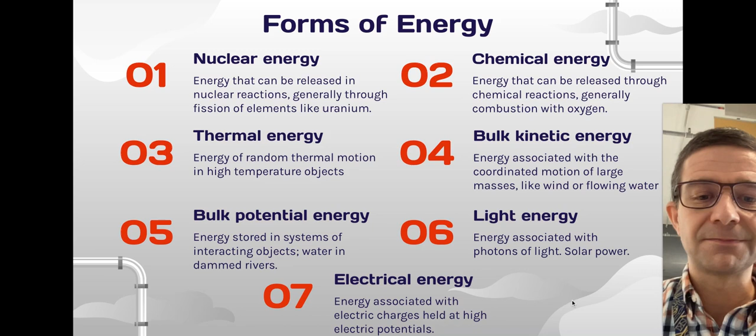When we think about energy in terms of power sources, we can split them into a couple of different groups. Primary versus secondary energy. We're talking about, is this a form of energy that can be harvested and is not processed or ready to be used? This would include fossil fuels. Oil is a big store of energy, but it's not directly usable for its energy benefit.

Same thing with nuclear matter, or even wind and solar, unless you're going to go and stand out in the wind to cool down or stand in the sun to warm yourself up. These are not directly usable for civilization for the purpose that we need energy.

Secondary energy, on the other hand, are the intentionally processed forms of energy, electricity being the primary one that we'll think about. But thermal energy is used in engines like combustion engines to produce motion. So this means that energy has been processed and is intentionally getting ready for use.

Renewable energy and non-renewable energy is a classification of energy having to do with whether the resource, particularly the primary energy source, is a finite resource or something that can be replenished constantly.

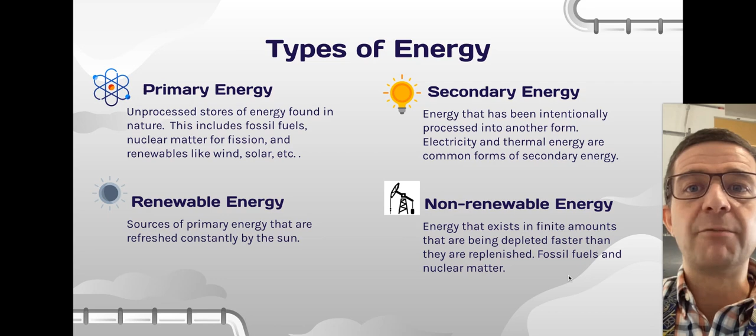Fossil fuels do replenish as biomass decays under heat and pressure to form coal and oil, but very, very slowly compared to the rate that we consume it. So those are just some definitions here.

In terms of the calculations or the problem solving that's done in this unit, two terms, specific energy and energy density, are important to learn and understand the distinction between them. These are used to quantify the amount of energy that's stored in non-renewable fuel sources. So how much chemical energy do you have in a kilogram of coal? That would be the specific energy associated with coal. And we see that that's 3.2 × 10^7 joules per kilogram.

So you can do problems where you figure out what mass of coal can be carried on a train to a power plant, and that can help you understand how much energy can be harvested from that mass of coal. On the other hand, energy density is looking at the energy per unit volume that can be produced by something. So we're usually talking about a meter cubed for the SI unit. For many of these, those numbers are just a ratio apart, the ratio being the density of that material.

But in this table here, you'll be able to see some patterns in energy density and specific energy. So pause and take a moment to look in the specific energy for patterns or differences, take a look in the energy density for patterns or discrepancies, and then I'll mention a few of them. You can pause now and look.

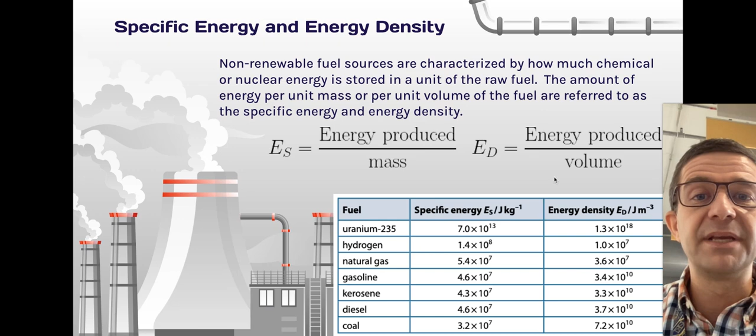I encourage you to follow this link to get to the interactive version of this data that looks at how global energy consumption has changed over time. The page that's there goes into a lot of detail about how these changes are measured and how things have been changing, particularly in the last 50 years or so. The data is a little old now.

Some of the things that you may notice here are, of course, that over the last 200 years, energy consumption globally has increased more than tenfold, starting particularly at the Industrial Revolution, and then with the advent of widely available electricity. So the demand for energy has grown and grown. And this curve also is driven by the relative affluence of human civilization as more and more people move to cities where there is access to all of these things that happened in the 50s to the 90s and early 2000s.

The other thing we notice is the recognition that oil and coal are limited and finite started to lead the drive to renewable or alternative energy sources. But even though a lot of technological advances have been made in these areas, they still account for a very, very small fraction of our energy portfolio. So taking a look through there and learning a little bit about the stories of energy and how energy consumption has changed would be a really good thing to do.

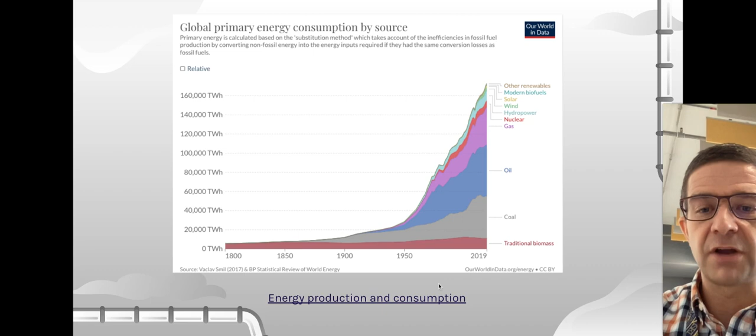Power production involves the conversion of energy from one form to another. And as we've learned with, say, a skater going up and down a ramp, that energy conversion from potential energy to kinetic energy is never 100% efficient. We think about friction as converting some of the kinetic energy into thermal energy that is dissipated or wasted. And the same thing is true inside of power plants. And following that energy to see where those inefficiencies are, to see where the energy is lost, because of course it's never truly lost, it's just converted into a form that we can't use.

Engineers use what are known as Sankey diagrams. A Sankey diagram is usually read from left to right, where energy or whatever quantity is being studied starts off in one form and then is generally converted along with some losses. This diagram is showing those losses all in red for a coal-fired power plant, leading to the energy that is necessary to, say, illuminate the page in a book. So here we have 100% of the energy, or 100 units of coal, inside of the power plant. 35 units are converted into electricity, and 65 units are lost during power generation to thermal energy. This is typical for a coal-fired power plant.

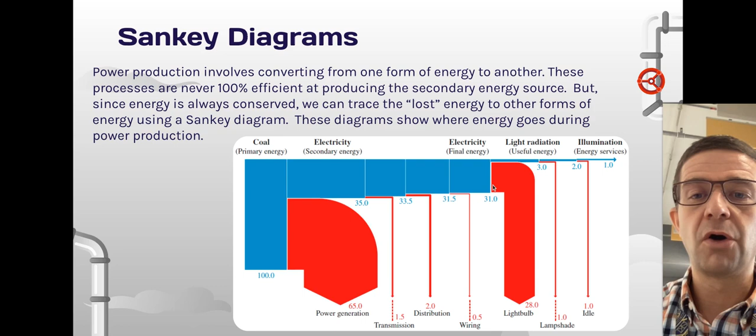As you go along, of course, you can always calculate percentages here to figure out how efficient something is. And these efficiency calculations are the second type of calculation that are often done in topic 8.1. Efficiency, either with power or with energy, is done as the ratio of, say, secondary energy to the primary energy. How much electricity do you get for how much coal? It can also be done in terms of power, the power out, or the useful power over the power in.

So here we have maybe a little more detail into a fossil fuel powered turbine. So we have the fuel oil here with 274 megawatts of fuel oil. MWe is a megawatt electrical, converting everything to electricity units. The boiler burns the oil, converting it to steam rather efficiently here with very few losses. You can heat up water. The turbine, on the other hand, is only about 60.

Is only about 30% efficient. So you have 172 units of energy that are lost to the condenser for every 72 units of electrical power produced.

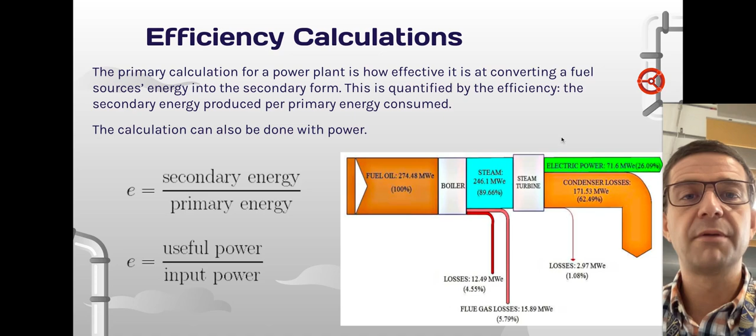The remainder of this topic, the sort of second half, looks at the specific types of power plants and their relative advantages and disadvantages. We're going to start off with two non-renewable power plant sources. These are the ones that are the most common. So we're looking at coal-fired power plants or oil or natural gas. And then we'll talk about the modifications that are necessary for the use of nuclear fuel.

This diagram here is representative of what you would generally look at. Inputs to the system are obviously the fuel source, and this could be coal or oil or natural gas. All would be approximately the same. And you need some source of cooling. Usually a river is used because it provides a constant source of cool water.

Burning the coal is pretty obvious. It produces carbon dioxide and water, as all combustion does. And that's used to boil water. Usually that water is in a closed loop and it's not directly sent out to the river, raised to very, very high temperatures, where it is fed into a steam turbine. As the steam pushes on the turbine, it cools, but needs to be condensed by being exposed to cooler temperatures.

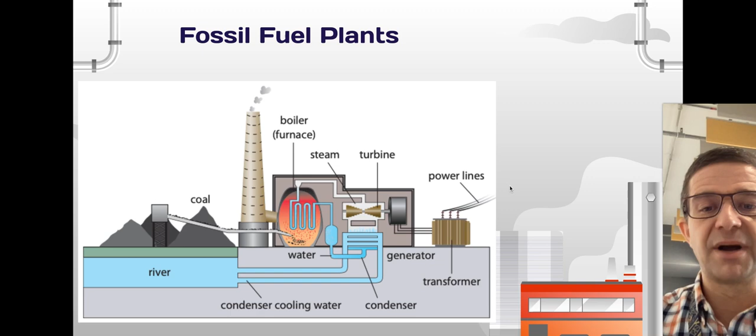The turbine, as it spins, turns a generator, and the moving magnets inside of a generator produce electricity, as we'll learn about in topic 11, and that's sent to a transformer and ultimately to power lines. So in terms of your Sankey diagram, we can compare what we see here to what we saw on the previous slide, where you have fuel coming in, the boiler producing steam, and the turbine producing electrical power. So we have the coal coming in, the boiler producing steam, the steam driving a turbine to produce electrical power.

When you work with nuclear fuel, combustion isn't the way that steam is being generated, but you are still working with all of the main parts of a steam-based power plant. It's just that the thermal energy is coming from nuclear fission. So in nuclear fission, you have fuel rods. Fuel rods would be those that contain the fissionable material, although usually it doesn't undergo spontaneous fission. It usually undergoes fission when it's exposed to or bombarded with

relatively low energy neutrons. The fission of the nuclei releases additional neutrons, and those neutrons go on to hit nuclei inside of the other fuel rods, creating what's known as a chain reaction. So one neutron, for example, might cause a nucleus inside of this second fuel rod to undergo fission, releasing 2 or 3 additional neutrons, which may bump into these other fuel rods, ultimately releasing more and more neutrons, which can be a runaway problem.

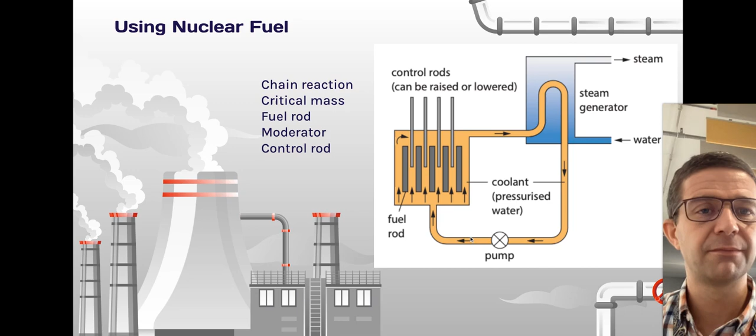So the moderator is important to slow down the neutrons to allow fission to take place. And in the process of slowing down those neutrons, it absorbs the energy that goes into the steam generator as well. I think that covers the basics of a nuclear power plant. Your textbook has some more details, be worth taking a look at.

When we talk about the risks and rewards of fossil fuels and nuclear fuels, they'll sound similar and different. The advantages of fossil fuel plants are that we have an extensive network of power plants in place in most countries that allow for fossil fuels to be used pretty much where they are needed to produce electricity for communities. It's a relatively well-developed technology with a variety of different power plant styles to use a variety of fossil fuels. Relatively cheap and high power output because of the high energy density of fossil fuels.

Disadvantages: they are non-renewable, so they will eventually run out. We also recognize that they produce a good deal of pollution, specifically carbon dioxide. But previously, they've also caused problems with acid rain and other byproducts. And the carbon dioxide in particular contributes to the greenhouse effect.

In terms of nuclear power, again, the high power output is probably the biggest advantage. And we also have relatively large reserves of nuclear fuels because we really haven't been using them as a civilization for particularly long. Nuclear power plants have the additional benefit of not producing greenhouse gases. However, they do pollute. The waste products can be very, very difficult to dispose of. At the moment, we just have storage for them, but not really a good way to process that waste. So it's piling up the way that all garbage does.

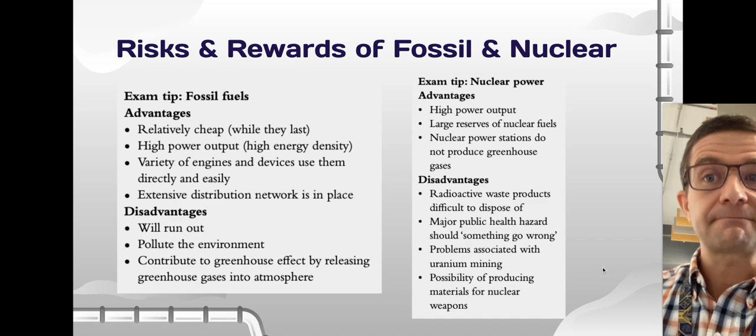Moving on to the much greener renewable energies, we have solar power. Solar power generally is thought of in two different forms. You have solar thermal energy, illustrated here on the right, where sunlight is used to directly heat some sort of liquid that is pumped through and used as a boiler. There are these large power plants that collect solar energy and focus it using mirrors to liquefy sodium, and that sodium just essentially drives a steam-powered turbine. Very safe and relatively inexpensive to produce for power plants.

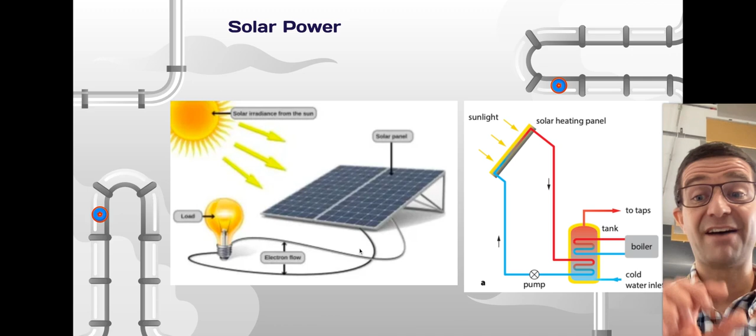On the other hand, much more recently, solar panels are used to directly convert sunlight into electricity. These semiconductor-based panels work via something similar to the photoelectric effect that we'll study in topic 12 to push electrons off of one surface and onto another surface to directly create a current. These are the solar panels that you maybe have on a little calculator or on the roof of your home.

A second renewable source of energy is hydroelectric power. Hydroelectric power is particularly interesting because of its ability to be used as a storage of energy, what's known as pumped storage. The basic idea of a hydroelectric power plant is that a large mass of water is essentially a source of stored potential energy. That potential energy can be converted into kinetic energy, either by exerting pressure on water that's down low or by flowing downhill. That kinetic energy can then be used to drive a turbine directly.

Down here, we see a schematic of essentially a dam. You have a reservoir. There's the dam that gives you an output of water down low. The output turns a turbine and releases the water to a river or to, in this case, a lower reservoir. The power associated with this, the power generation, essentially has to do with the flow rate of water. The volume per unit time can be converted into a mass per unit time by multiplying by the density.

And then you have this rho VGH, which is essentially MGH per unit time. So it's like potential energy divided by time is the power. Ultimately, if you produce power for a long period of time, that reservoir empties out. Hydroelectric power is considered renewable because when sunlight hits water, it goes through the water cycle, and ultimately the rain will bring that water back up to the upper reservoir where it can be emptied again.

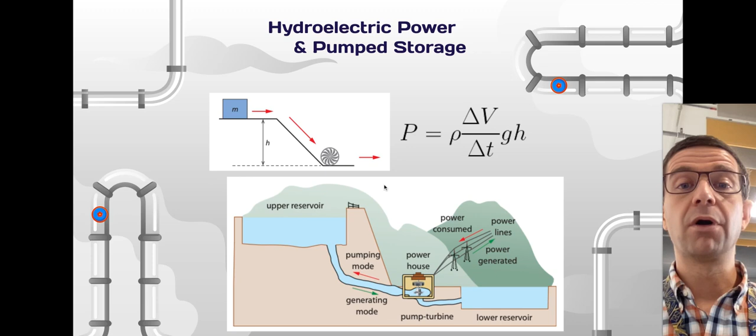So similar to a rechargeable battery, you can put energy in and then have that energy taken out again later. So a pumped storage facility can kind of act as a battery for a solar power plant if you can build one. And the last form of renewable energy that we'll look at, whoops, I have to shrink because that equation is wrong if I don't shrink myself, is wind power.

Wind power is now the fourth time we'll talk about a turbine, but it moves the turbine directly. So if you point a turbine into the wind and it turns, it can power a generator directly. If you have a windy area, these can be very, very useful to power the grid. The power here, an interesting fact, you see the density of air, obviously, and larger cross-sectional area turbines obviously produce more power. The interesting thing is that the power scales as the cube of the speed of the wind.

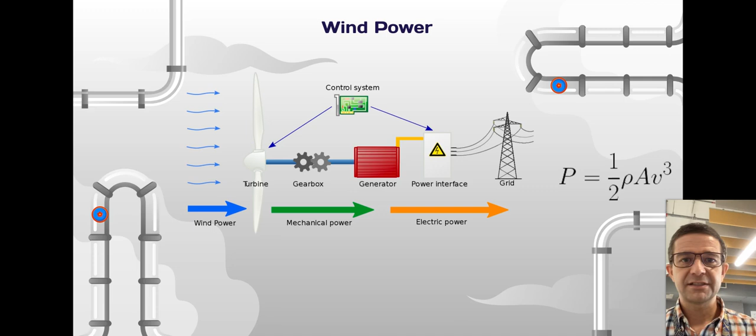And what this means is that if you have a particularly windy area where speeds are very high, you can produce an awful lot of power. But as the wind dies down a little bit, if the wind speed is cut in half, the amount of power decreases by a factor of 8. So the wind turbines can really only work when you're at high speeds for the wind. And that closes this. Oh no, sorry, one more thing. So relative advantages and disadvantages.

All of these renewable energy sources have the same basic advantages. They're essentially free in that the primary energy source is not owned by anyone. Nobody, well, rivers to some extent, but nobody owns the wind, nobody owns the sun. They're inexhaustible resources. So once you've produced the power plant, apart from upkeep, they're relatively inexpensive, although sometimes developing them can be quite expensive.

Wind and solar have disadvantages that they're dependent on local conditions. If it's not windy, then you're not getting any wind power. If the sun is not out or it's cloudy, you're not getting very much solar power. On the other hand, hydroelectric power is much more reliable, but only works in very specific locations where you can have a reservoir.

Hydroelectric and wind have some aesthetic problems. There are a lot of changes to the environment that come from building a hydroelectric plant, backing up a river. Oftentimes, communities along the river are destroyed and sunk underwater. And many people don't like the aesthetics or the noise that's associated with wind power. So those can be problems with convincing people to use those who are used to having the relatively quiet and non-invasive energy associated with fossil fuels. Solar power seems relatively advantageous.

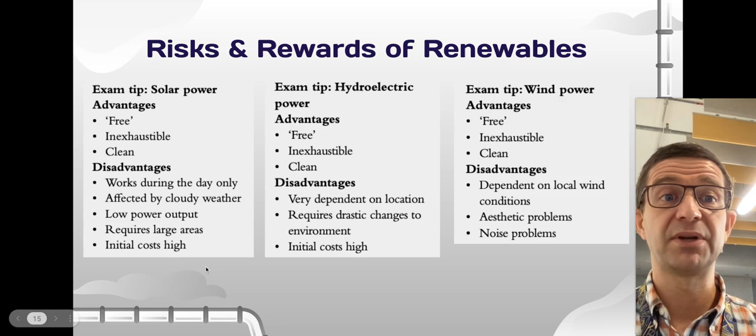And that brings us to the end of topic 8.1. In terms of things that you'll want to do, there's definitely some problem solving associated with specific energy and energy density problems, so you should practice there. Interpreting Sankey diagrams and doing efficiency calculations are also important. The quick overview that I've given you to the different types of power plants and their relative safety covers a lot of the high points. Maybe you knew a lot of those things already, but the reading inside of your textbook can be much more helpful.

And then I can't stress enough how interesting that Our World in Data website is to take a look at how human civilization over the last 200 years has really changed by our ability to work with primary sources of energy and particularly to produce electricity.